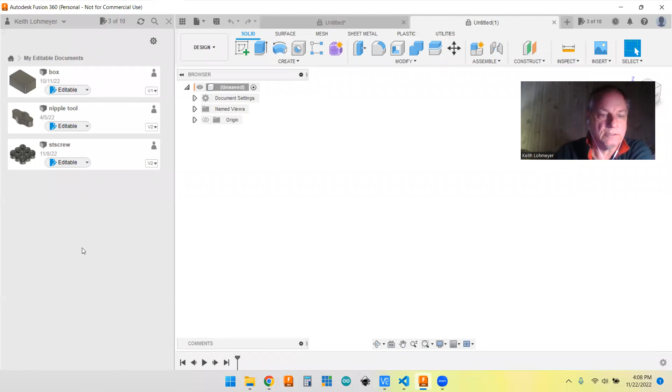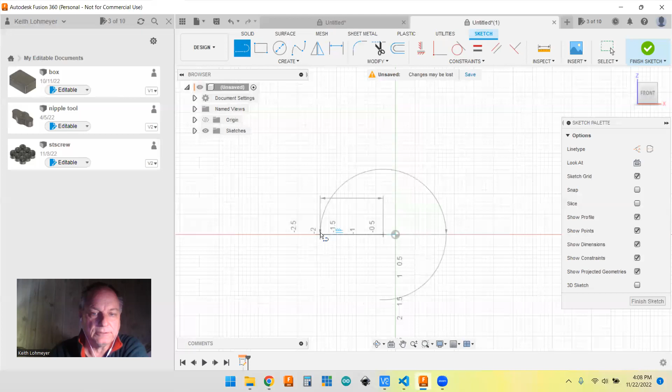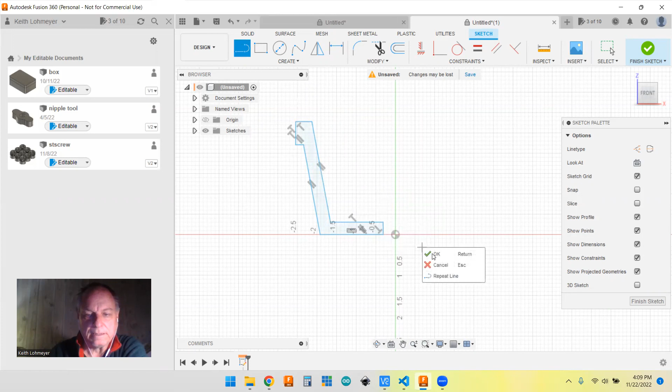All right, so we're going to start our sketch. Normally most sketches start on the bottom, but because we're doing a profile of it, I'm going to start on the side. I'm going to just take the line tool and just start creating a basic profile of our flower pot. We'll just start here. Create the lip on it. And that should be about it.

And you can see it already added a lot of our constraints to it. Looks like we got some constraints on there. We'll see if we need to add any a little later. But at this point, we can go ahead and set up our parameter table for this. So we'll go ahead and get our parameters up. So we're going to add a parameter.

So the first parameter, almost all the terracotta pots I've seen have a hole in the bottom of them. That's why I started it offset here. So we're going to make that, and that's the radius. So we're going to call it hole radius. I'm in inches, so I'm going to make that 0.375. That'll give us a 0.75 inch diameter hole in it. Okay.

And we're going to need the bottom width, so we can do the bottom radius. So we'll add that. And we'll maybe make that, oh, I don't know, 4 inches maybe. Oh, this is radius, so let's make it 2 inches radius. That'll make it a 4-inch bottom pot.

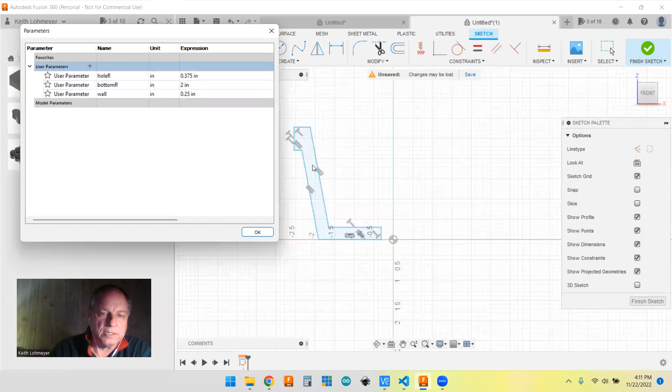We also need the angle here. It's 90 plus, so maybe 100 degrees. So we'll start off with 100. So we'll just call it angle. And it's not in inches, so we got to say no units. I don't think we got degrees as an option, do we? Oh yeah, we do, angle in degrees. Okay. We got degrees, and then we'll say 100. Okay.

And let's see. We need a few more. Oh, we don't have a height of it yet, so we'll need to do a height. We'll call it just height. And we'll make it 6 inches tall. Okay. That's our height. And then we have this lip thing here that we want to have.

So I think I'm going to make this one dimension and then this be a fraction of it, maybe 1/4 of it, but I can do that in there. So we'll just do this lip. So we'll call it lip. Okay. And we'll start off with a 1-inch lip. Okay.

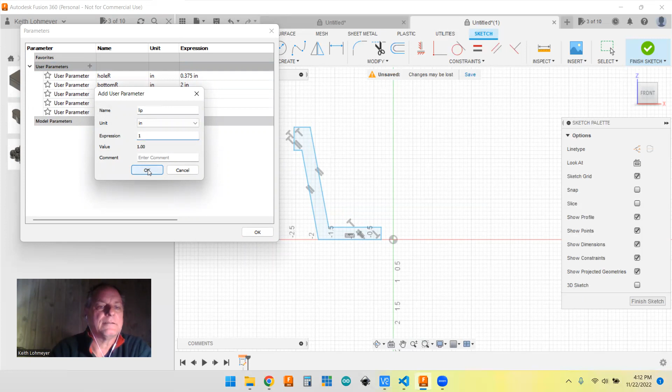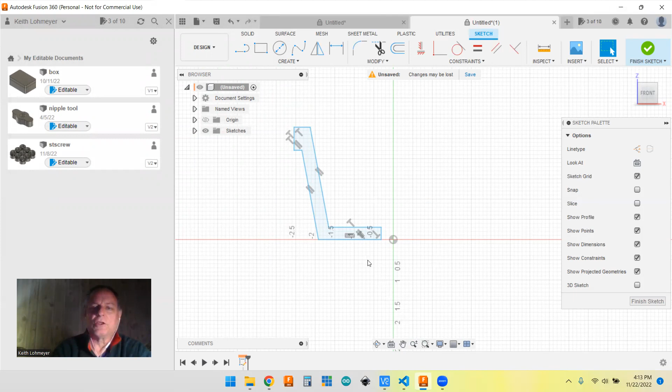And that might be it; we'll see if we have to add any more when we do it. So let's start off. You can really get out of whack by doing some of this stuff. So I think the first thing I want to do is, we have what they call the constraint of fix. I want to fix this bottom to this bottom here. So I'm just going to say fix that in place. So that's going to be good for that.

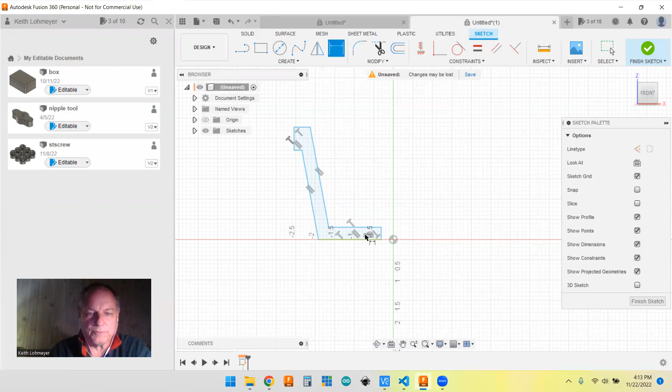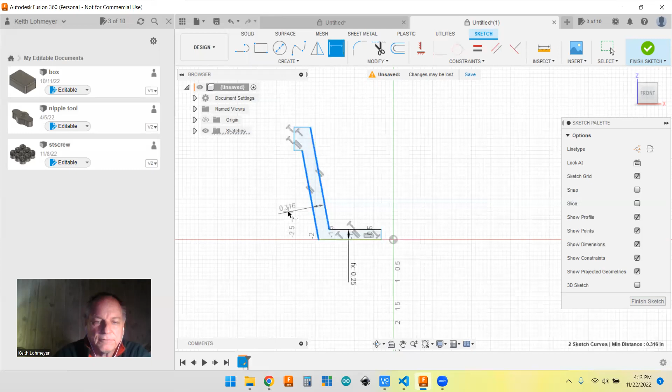So now we're going to go to dimensions. The wall would be here to here. So let's put that, and that's going to be wall. Hit enter. Wall is also here to here. We want to make sure that it doesn't go 90 degrees. We want it on the angle like that. So we're going to say wall. All right, so that's got that going on.

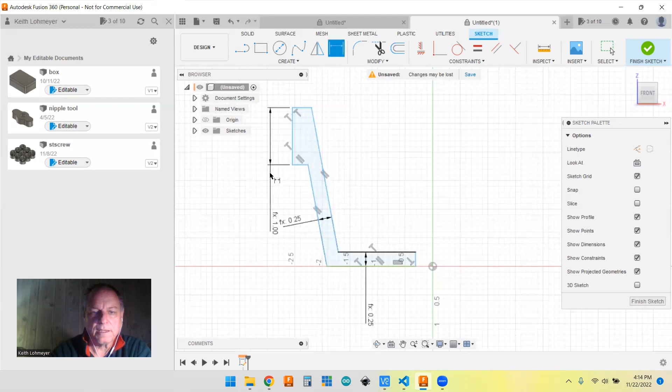All right. I think I'm going to do these up here first. So this dimension here is going to be lip. All right. I said this was going to be lip divided by 4. So lip divided by 4. Let's see if that works. There we go.

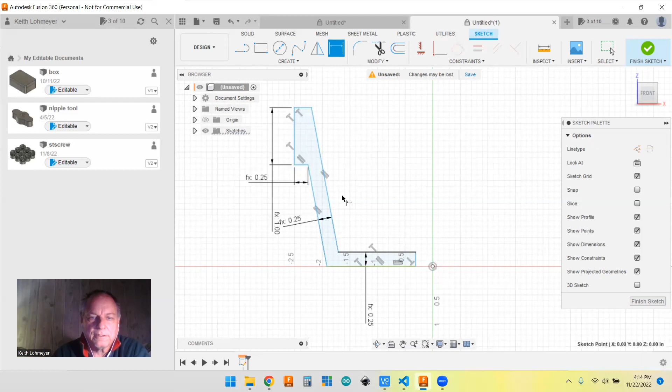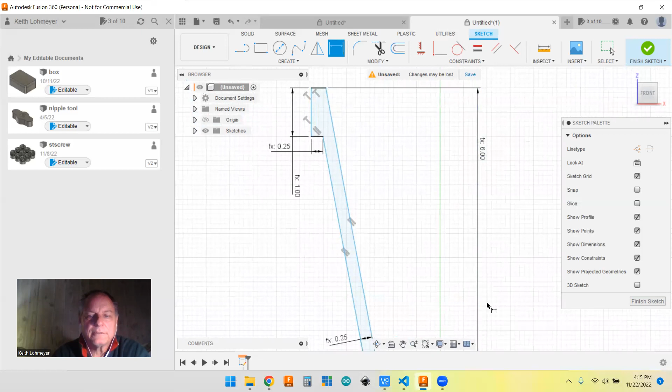Let's see what else we need. Let's do our overall height, I guess. So we can go from here to here, which would be our height. And that's just height. All right, let's scroll out some. All right, so what now? We have to get this bottom thing, so we can scroll in a little bit on this bottom.

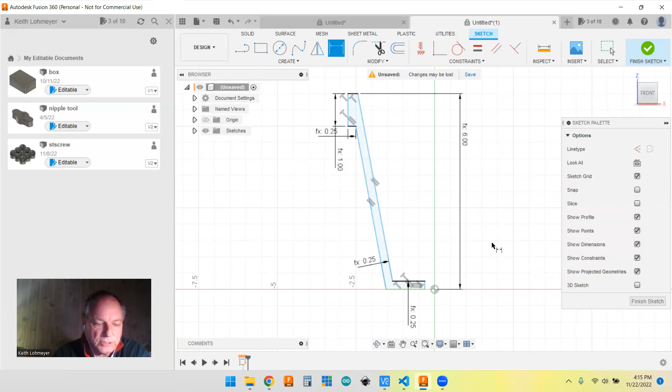Oh, let's put our angle in. It looks like they got the parallels on these, so we should only have to put one angle in. So we can go from here to here, and we just want angle. All right, we got our angle going on there. Still got lots of blue going on, but we'll see if we can fix that kind of quick here.

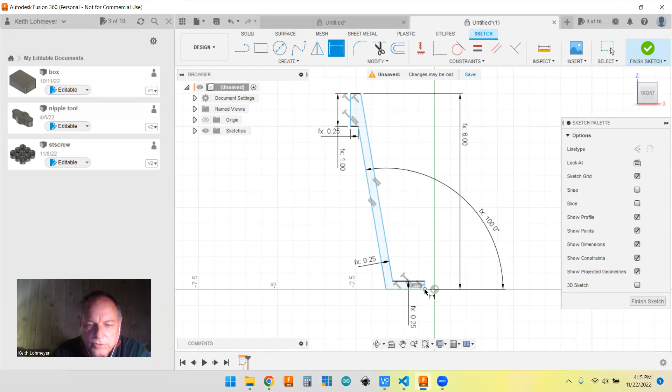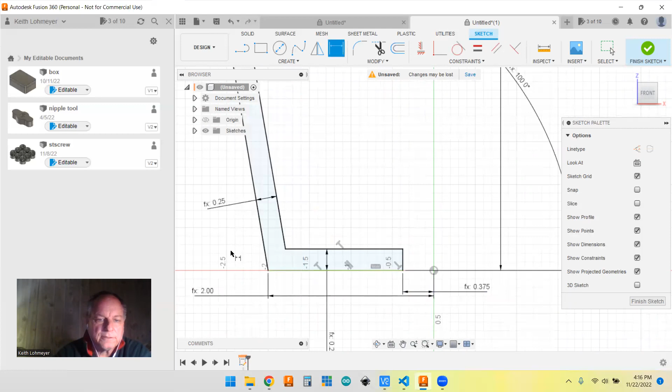So, like I said, we got our hole radius here. So let's scroll in, go from here to here, and that's hole radius. And we got our bottom width. Let's see if we can break it doing this. Called it bottom, didn't we? Bottom radius, that's right. Lots of black coming on. Looks like it's all defined, huh? All right. Looks like we're good.

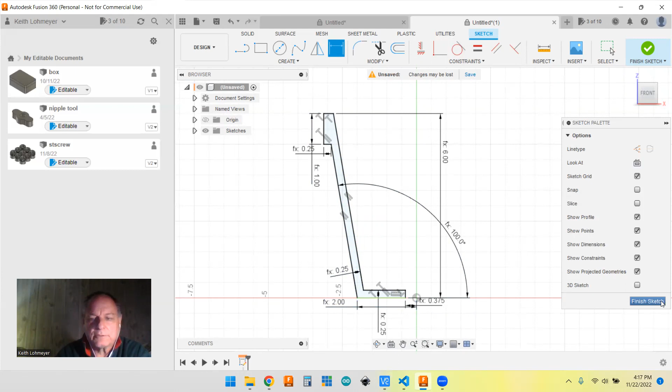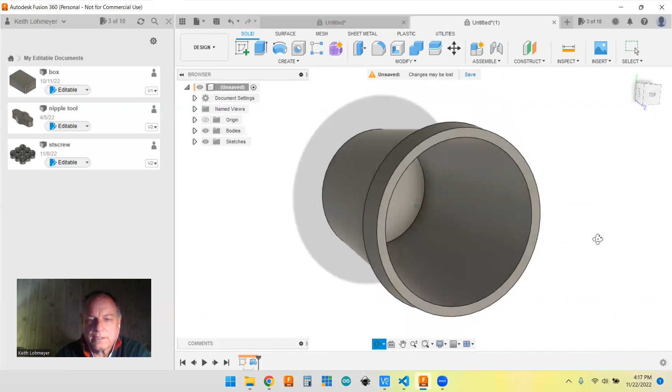We should be able to just finish our sketch. See, this bottom one is green because we used that fix, so it's affixed to the bottom. Everything else is black. So let's see if that works. And then we just want to revolve this. It's already selected, and we want to revolve it around here. And that's our pot, and we'll call it new body. We can say okay. A hole in the bottom, got our pot, got our lip.

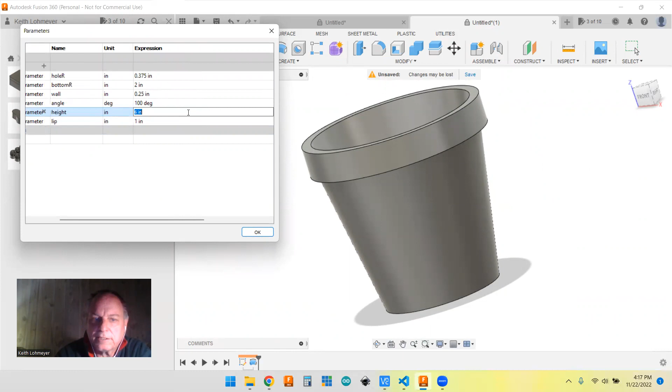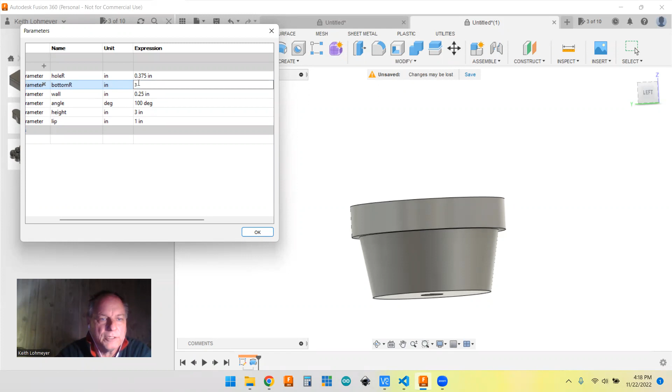Let's go see what we can modify on this. Change our parameters. So let's go height and make it a little shorter. We'll make it a 3-inch pot, see what happens. There we go, that didn't break it. Let's make it a wide pot. So we want our bottom radius. Remember, this is radius. Let's go to 3 on this as well. That'll give us 6 inches wide at the bottom. See if that breaks it. Nope, that didn't break it.

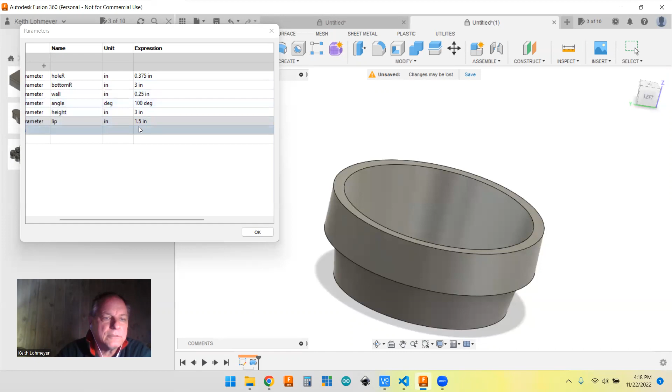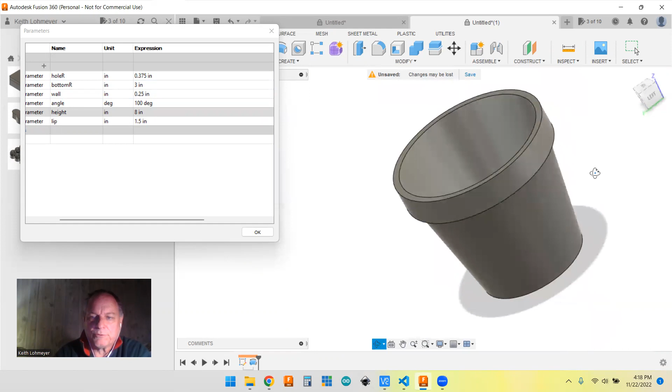Let's do our lip, make it 1.5. Kind of doesn't look right, but it's okay. Let's make it a much taller pot. So we'll take our height back up to 8 inches. Thought I made it 8. There you go. That looks like a bigger pot. So anyhow, that's my parameterized flower pot. I'm not going to turn it the orange color; we all know how to do that. So anyhow, that's my video for today.